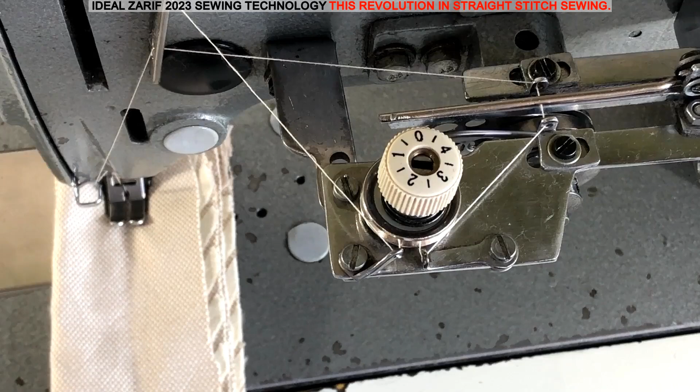During sewing, the top thread tensioner nut and the bottom thread tensioner nut, not shown, remain in a fixed position, ensuring the normal thread tension, neither too loose nor too tight.

In our Ideal Zarif 2023 year double thread chain stitch technology, the needle is not involved in pre-tightening the top thread loop from the previous stitch. As a result, for the first time ever, a double thread chain stitch sewing machine uses a needle with a one long groove. This design offers greater resistance to bending compared to the double groove needle used in existing double thread and multi-thread chain stitch technologies.

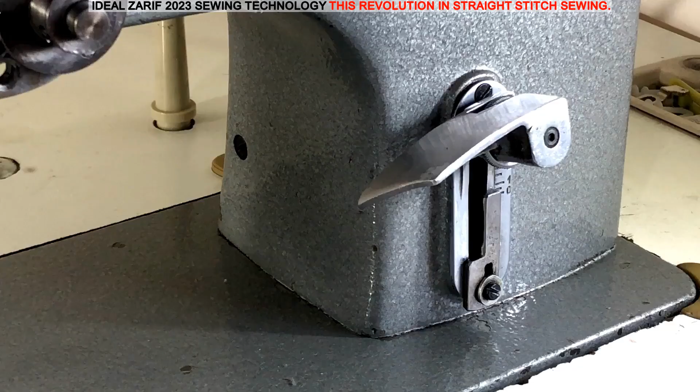Thanks to our Ideal Zarif 2023 year sewing technology, it has become possible for the first time in the world to reduce the length of the double thread chain stitch to 0.5 mm. This allows for a more secure tacking of the chain stitch seam end and prevents unraveling due to condensed stitches at a stitch length of 0.5 mm.

Streamlined design with innovative rotary looper. The world's first sewing machine with an exceptionally simple mechanical design, made possible by the incorporation of a rotary looper, 2 rotary twin-disc cam thread take-ups, a simple needle crank slider mechanism and the absence of needle guards.

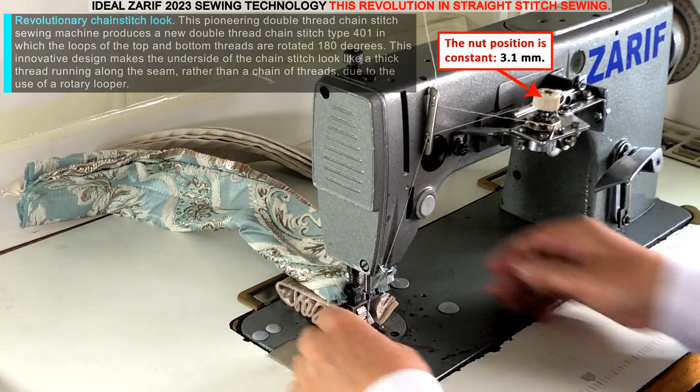Revolutionary chain stitch look. This pioneering double-thread chain stitch sewing machine produces a new double-thread chain stitch type 401 in which the loops of the top and bottom threads are rotated 180 degrees. This innovative design makes the underside of the chain stitch look like a thick thread running along the seam, rather than a chain of threads, due to the use of a rotary looper.

One long groove needle for maximum strength. For the first time, a double-thread chain stitch sewing machine uses a needle with one long groove to produce a double-thread chain stitch type 401, which offers greater flexural strength than a needle with two long grooves used in existing double-thread and multi-thread chain stitch technologies.

Advanced capabilities for sewing thick materials. This groundbreaking sewing machine can sew materials up to 8 mm thick with a short needle bar stroke of 32 mm, thanks to our know-how.

Breakthrough in needle stability for different materials. This revolutionary sewing machine can sew different materials without needle breakage and needle point deformation, achieved by the use of a rotary looper and a needle plate with a slot for the needle, coupled with the absence of needle guards.

Elimination of skipped stitches and unraveling. This pioneering sewing machine, thanks to our innovative design, can sew materials without a single skipped stitch, which is critical for chain stitch seams, as all types of chain stitch seams are prone to unraveling, both at the end of the seam if not securely tacked, and from the skipped stitch back to the beginning of the seam.

No thread breaks. The first sewing machine capable of sewing through materials without thread breaks when low-strength threads and threads with knots are not used, thanks to the smooth tightening of the top and bottom threads with two rotary twin-disc cam thread take-ups and our know-how.

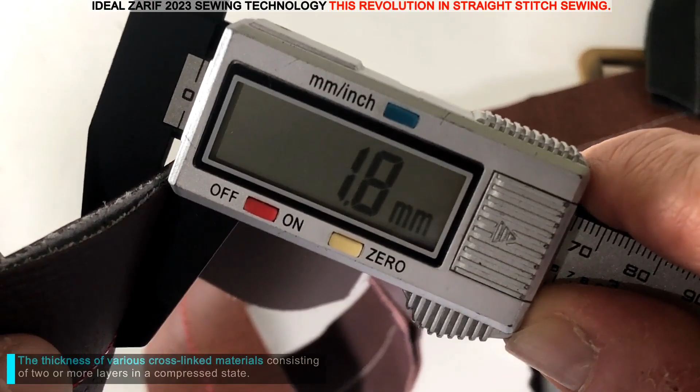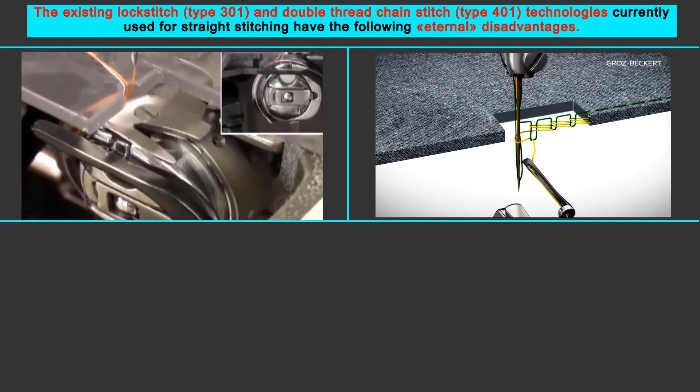The existing lockstitch, type 301, and double-thread chain stitch, type 401, technologies currently used for straight stitching have the following eternal disadvantages common to both existing sewing technologies: they cannot guarantee sewing without skip stitches, thread breakage, needle breakage, and needle point deformation.

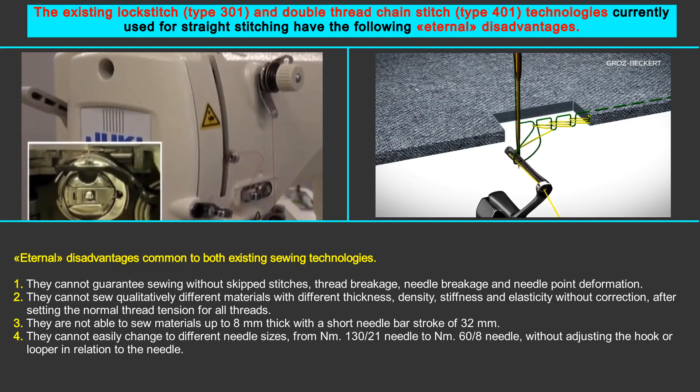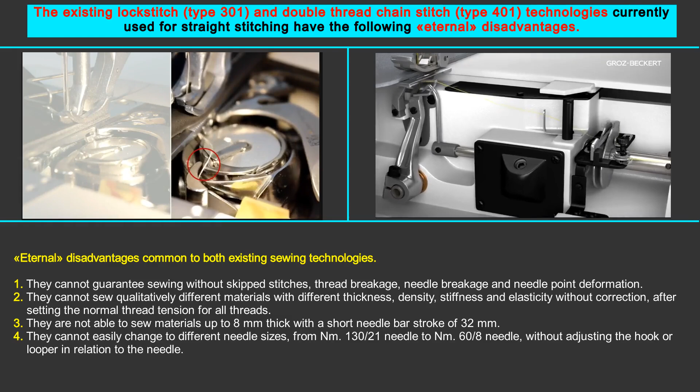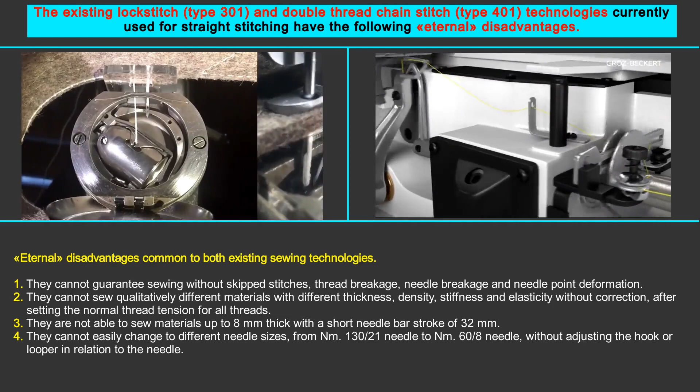They cannot sew qualitatively different materials with different thickness, density, stiffness, and elasticity without correction, after setting the normal thread tension for all threads. They are not able to sew materials up to 8 mm thick with a short needle bar stroke of 32 mm. They cannot easily change to different needle sizes, from number 130 needle to number 60 needle, without adjusting the hook or looper in relation to the needle.

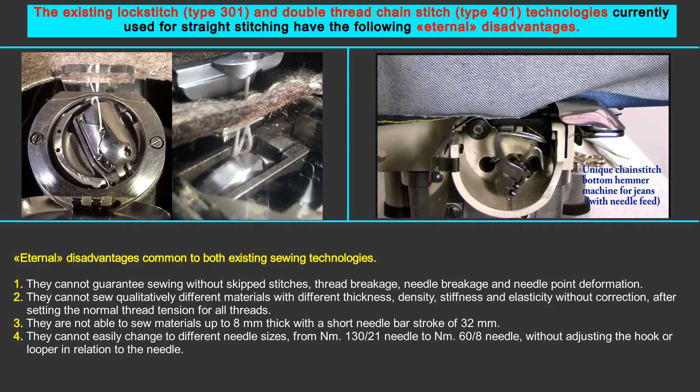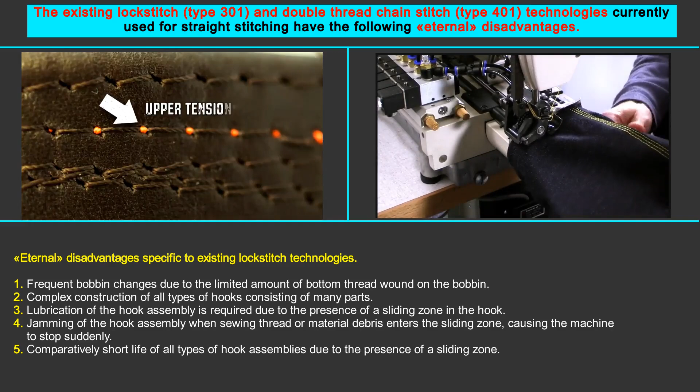Eternal disadvantages specific to existing lockstitch technologies: frequent bobbin changes due to the limited amount of bottom thread wound on the bobbin, complex construction of all types of hooks consisting of many parts, and lubrication of the hook assembly is required due to the presence of a sliding zone in the hook.

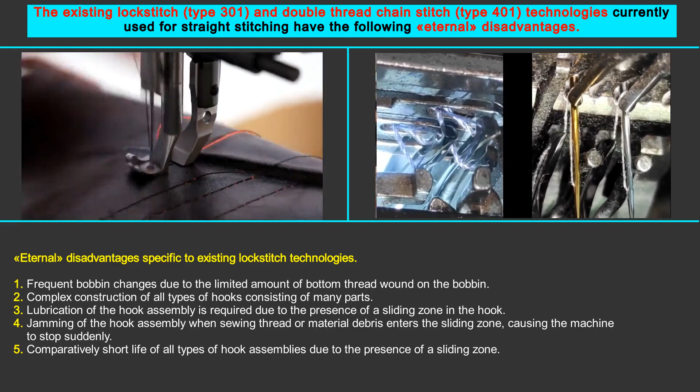Jamming of the hook assembly when sewing thread or material debris enters the sliding zone, causing the machine to stop suddenly. Comparatively short life of all types of hook assemblies due to the presence of a sliding zone.

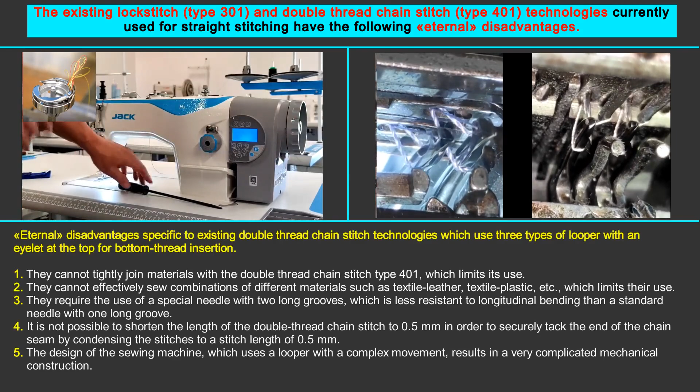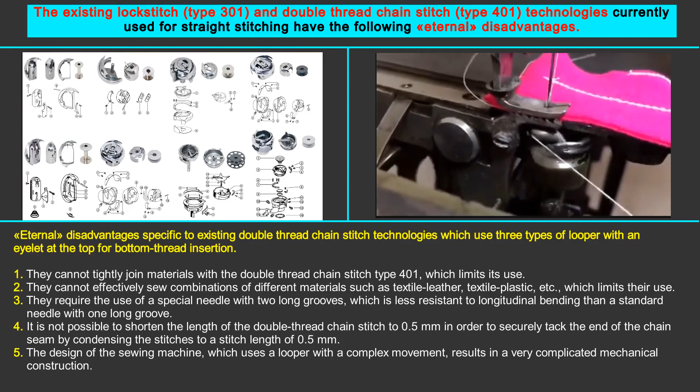Eternal disadvantages specific to existing double thread chain stitch technologies, which use 3 types of looper with an eyelet at the top for bottom thread insertion: they cannot tightly join materials with the double thread chain stitch type 401, which limits its use. They cannot effectively sew combinations of different materials such as textile leather, textile plastic, etc., which limits their use.

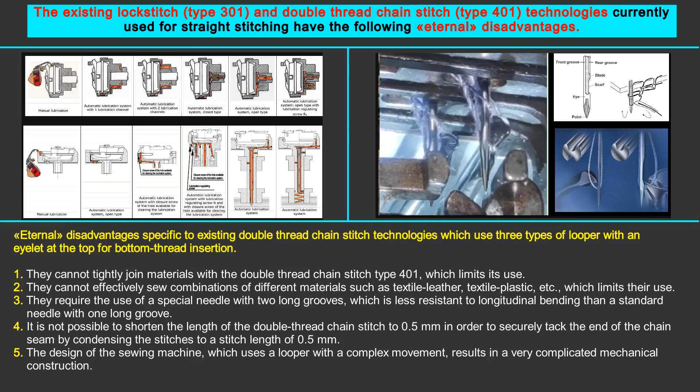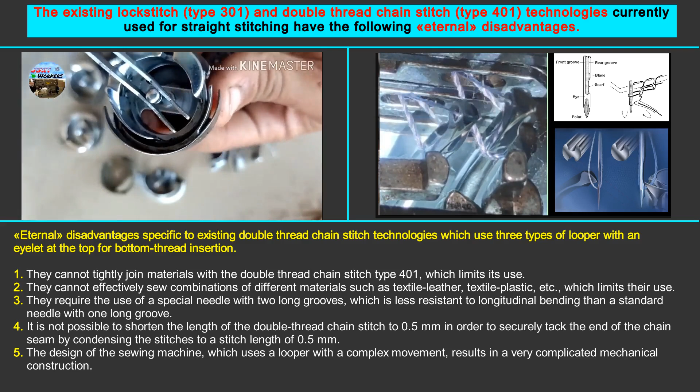They require the use of a special needle with 2 long grooves, which is less resistant to longitudinal bending than a standard needle with 1 long groove. It is not possible to shorten the length of the double thread chain stitch to 0.5 mm in order to securely tack the end of the chain seam by condensing the stitches to a stitch length of 0.5 mm.

The design of the sewing machine, which uses a looper with a complex movement, results in a very complicated mechanical construction.

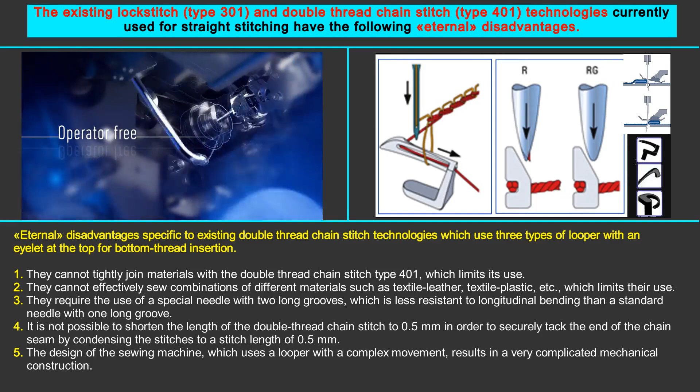Our ideal Zarif 2023 year double thread chain stitch technology has revolutionized sewing machine design and straight stitch sewing. For the first time, a rotary looper is used to form a double thread chain stitch, resulting in the world's first new double thread chain stitch type 401, where the top and bottom thread loops are rotated 180 degrees.

For the first time, an ordinary needle with a single long groove is used to form a double thread chain stitch, as the needle does not participate in the pre-tightening of the top thread loop placed in the previous stitch. For the first time, materials up to 8 mm thick can be sewn with a needle bar stroke of 32 mm.

For the first time it is possible to sew materials of different thickness, density, stiffness and elasticity without any adjustments by setting the normal tension for all threads. For the first time it is possible to sew without skipped stitches, thread breakage, needle breakage and needle point deformation, provided the thread is free of knots and the needle size matches the material being sewn.

For the first time, using our know-how, it is possible to tightly pull the top thread loop in a stitch to achieve a dense material join, or to loosely pull the top thread loop in a stitch to get smooth seams on light materials and elastic seams in stretchable materials, without adjusting normal thread tension.

For the first time, the maximum allowable gap between the needle and the tip of the looper has been increased to 0.5 mm, allowing an easy transition from a number 130 needle to a number 60 needle without adjusting the looper relative to the needle.

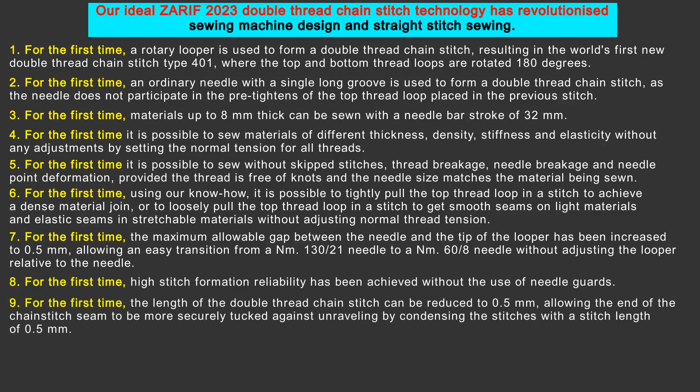For the first time, high stitch formation reliability has been achieved without the use of needle guards. For the first time, the length of the double thread chain stitch can be reduced to 0.5 mm, allowing the end of the chain stitch seam to be more securely tucked against unraveling by condensing the stitches with a stitch length of 0.5 mm. For the first time, it is possible to develop different types of sewing machines...

...with different types of platforms and different types of material feed, with a very simple mechanical design that operates with high reliability and long service life.

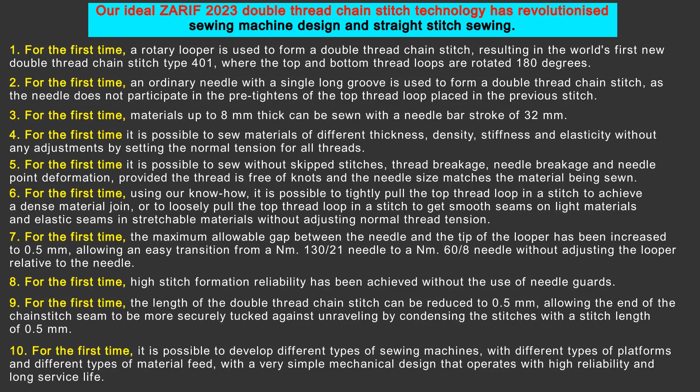History of Zarif double thread chain stitch technology with rotary looper.

In 1994 we came up with the idea of creating a double thread chain stitch type 401 using a rotary looper. We applied for a patent for this new Zarif double thread chain stitch technology, and in 2000 US patent number 6095069 was granted.

Before our invention, the rotary looper was used in the single thread chain stitch technology, type 101, on single thread chain stitch sewing machines and button machines.

History records that the rotary looper was invented in 1857 by the American inventor James Edward Allen Gibbs for his single thread chain stitch sewing machine, based on the single thread chain stitch technology, type 101, where the rotary looper makes 1 revolution per needle cycle. See US patent number 17427.

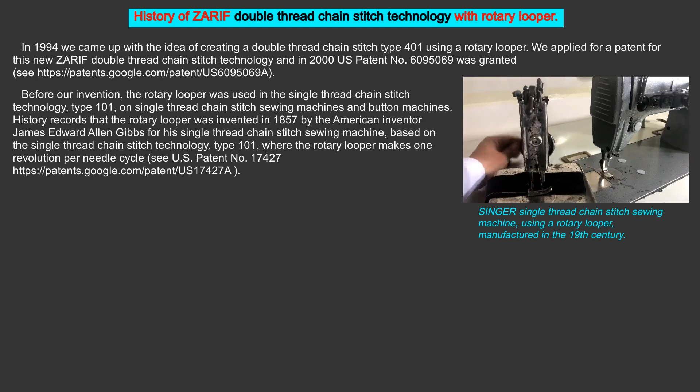A rotary looper is a unique and the only tool in sewing technology that can rotate loops of thread around its body by turning them 180 degrees with its tail.

As is known, the rotary looper is made in one piece and has 3 zones: the head zone with a front tip to catch the thread and a rear tip to release the thread loop from the body of the looper, the tail zone for rotating the thread loop through 180 degrees, and the shaft zone for attaching the looper to the machine.

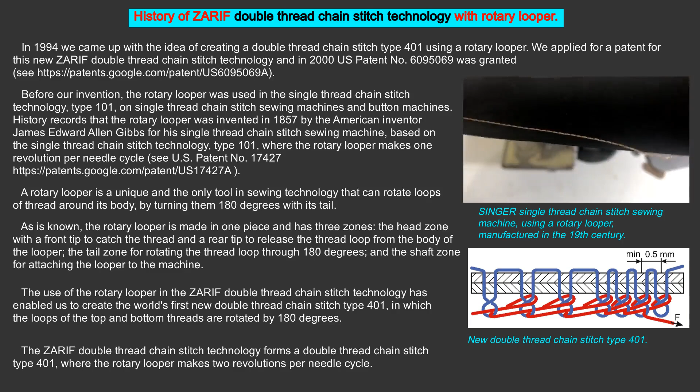The use of the rotary looper in the Zarif double thread chain stitch technology has enabled us to create the world's first new double thread chain stitch type 401, in which the loops of the top and bottom threads are rotated by 180 degrees. The Zarif double thread chain stitch technology forms a double thread chain stitch type 401, where the rotary looper makes 2 revolutions per needle cycle.

Zarif double thread chain stitch technology with rotary looper, invented by us in 1994. See US patent number 6095069.

In the Zarif double thread chain stitch technology, the top thread is fed to the looper by a needle with a vertical reciprocating motion, as is usually done. To feed the bottom thread to the looper, a bottom thread pusher is used, which makes oscillating movements in the horizontal plane. Since the rotary looper can loop thread around its body in the form of a loop...

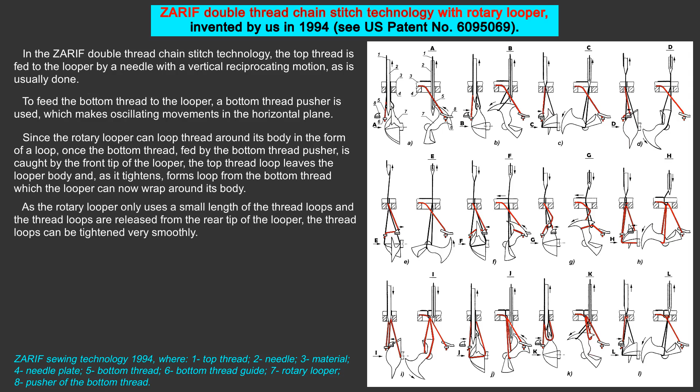Once the bottom thread, fed by the bottom thread pusher, is caught by the front tip of the looper, the top thread loop leaves the looper body and, as it tightens, forms a loop from the bottom thread which the looper can now wrap around its body. As the rotary looper only uses a small length of the thread loops, and the thread loops are released from the rear tip of the looper, the thread loops can be tightened very smoothly.

Therefore, the Zarif double thread chain stitch technology uses 2 rotary twin disc cam thread take-ups to feed and tighten both the top and bottom threads, with each thread being controlled separately.

History of the prototype development of the Zarif sewing machine based on Zarif double thread chain stitch technology with a rotary looper. In 1997, we decided to build a prototype sewing machine to test our new Zarif double thread chain stitch technology with a rotary looper, which we had invented in 1994.

We chose a Class 1022 lockstitch industrial sewing machine from the Belarusian company Orsha because it was widely used in Uzbekistan at the time and was relatively affordable. The machine had a needle bar stroke of 32 mm and was designed to sew fabrics of medium thickness.

After a thorough review of the machine's design, we successfully integrated our new Zarif sewing technology into the machine, retaining only the mechanisms of the material feed, presser foot, and needle. Thus, in 1997, we produced the world's first prototype of the Zarif double thread chain stitch sewing machine with rotary looper.

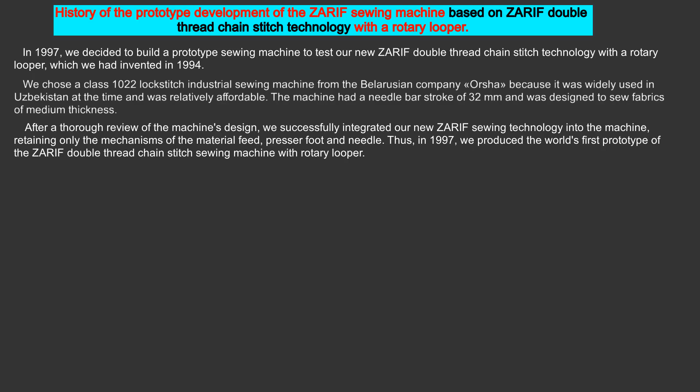Trials on a prototype Zarif sewing machine allowed us to identify some of the shortcomings of our new Zarif double thread chain stitch technology developed in 1994.

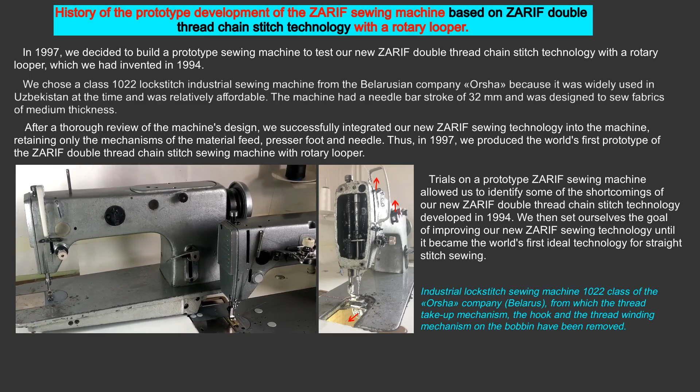We then set ourselves the goal of improving our new Zarif sewing technology until it became the world's first ideal technology for straight stitch sewing. We have reached our goal in 2023.

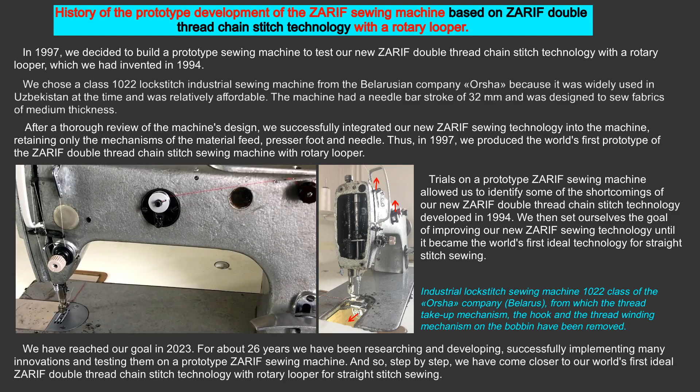For about 26 years we have been researching and developing, successfully implementing many innovations and testing them on a prototype Zarif sewing machine. And so, step by step, we have come closer to our world's first ideal Zarif double thread chain stitch technology with rotary looper for straight stitch sewing.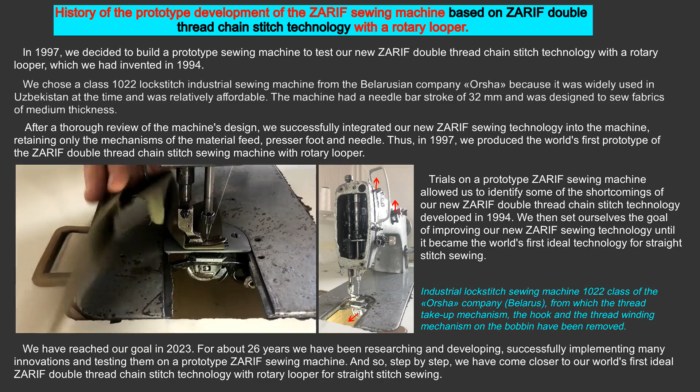Stitch type, working units, and technical specifications of the prototype Zarif sewing machine, based on the ideal Zarif 2023 year double thread chain stitch technology with rotary looper.

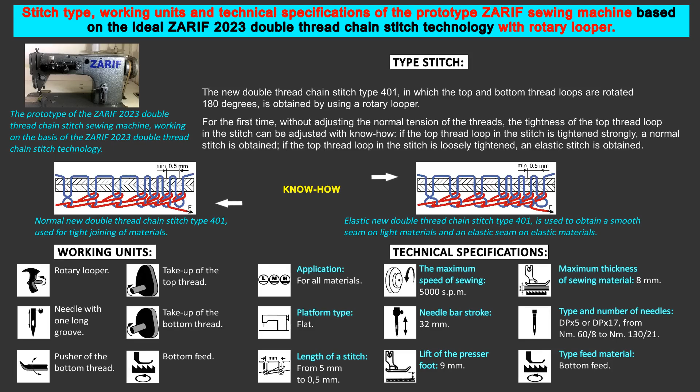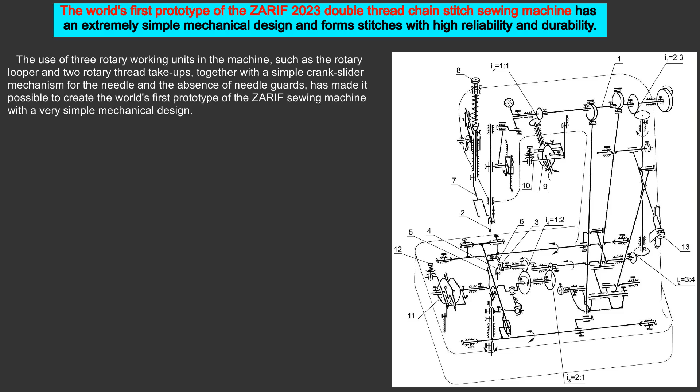The world's first prototype of the Zarif 2023 double thread chain stitch sewing machine has an extremely simple mechanical design and forms stitches with high reliability and durability. The use of 3 rotary working units in the machine, such as the rotary looper and 2 rotary thread take-ups, together with a simple crank slider mechanism for the needle and the absence of needle guards, has made it possible to create the world's first prototype of the Zarif sewing machine with a very simple mechanical design.

In addition, the machine is the first in the world to allow easy switching between different needle sizes, from needle number 130 to needle number 60, without having to adjust the position of the looper relative to the needle, thanks to the world's first increase of the maximum allowable gap between the needle and the looper tip to 0.5 mm.

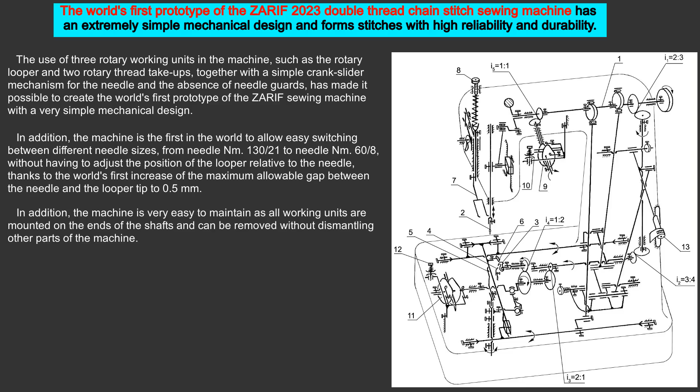In addition, the machine is very easy to maintain, as all working units are mounted on the ends of the shafts and can be removed without dismantling other parts of the machine.

Kinematic diagram of the prototype Zarif 2023 year double thread chain stitch sewing machine.

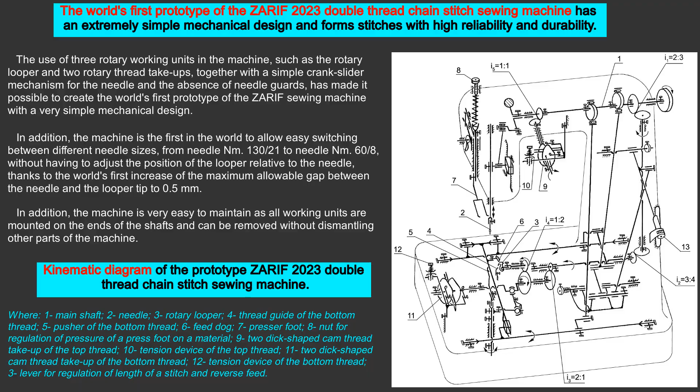Our automatic thread trimming technology for the Zarif double thread chain stitch technology with rotary looper. It is well known that most modern industrial sewing machines are equipped with automatic thread trimming, and all automated sewing systems require automatic thread trimming.

With this in mind, we have long been researching and developing automatic thread trimming technology for our Zarif double thread chain stitch technology with rotary looper. Thanks to these efforts, we successfully invented the automatic thread trimming technology for our Zarif double thread chain stitch technology with rotary looper in 2020, and further improved it in 2021 and 2023.

The advanced version of our automatic thread trimming technology, which we invented in 2023, has not yet been physically manufactured to ensure its practical functionality. However, the drawings of our automatic thread trimming technology prove that it works in theory. At present we cannot disclose the details of our automatic thread trimming technology, as it is not yet patented.

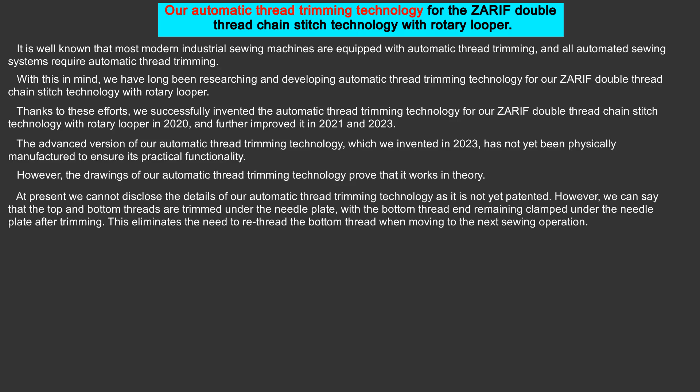However, we can say that the top and bottom threads are trimmed under the needle plate, with the bottom thread end remaining clamped under the needle plate after trimming. This eliminates the need to rethread the bottom thread when moving to the next sewing operation.

If the sewing process is finished with condensed stitches of 0.5 mm stitch length and manual thread trimming, the resulting chain stitch seam will be difficult to unravel from the end of the seam. If the sewing process is finished with condensation stitches at a stitch length of 0.5 mm and with automatic thread trimming, the resulting chain stitch seam cannot be unraveled from the end of the seam, as the end of the top thread passes through the last loop of the bottom thread.

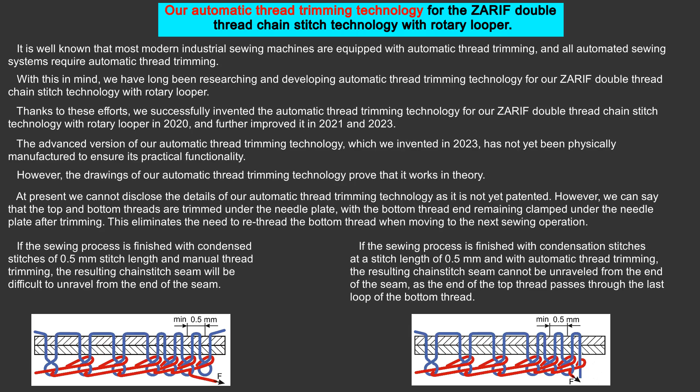Our ideal Zarif 2023 year double thread chain stitch technology with rotary looper opens a new era in the development of automated straight stitch sewing.

It is well known that the future of mass production in various sewing industries is closely linked to automation, and the automation of sewing processes plays an important role in this transformation. Currently, some sewing operations are already being automated using robotic manipulator-controlled sewing systems. In the future, these robotic manipulators may be replaced by more advanced humanoid robots.

When it comes to automated sewing, it is essential that the process is performed to a high standard, ensuring that there are no skipped stitches, thread breakage, needle breakage and deformation of the needle point. Efficient sewing of different materials without the need for adjustments is also critical to the automation of the sewing process.

Our ideal Zarif 2023 year double thread chain stitch technology with rotary looper for straight stitch sewing is the perfect solution to meet all these requirements. Our prototype Zarif sewing machine has proven this in practice, but only when the material is fed in one direction.

This allows us to create different automatic sewing systems based on this technology, where the material is fed in a single direction. However, there are many sewing operations where the stitch must follow a complex path. In such cases, stitch formation must be independent of the material feed direction. With this in mind, we have been working for a long time to develop a device that would allow our Zarif double thread chain stitch technology with rotary looper to produce stitches regardless of the direction of material feed.

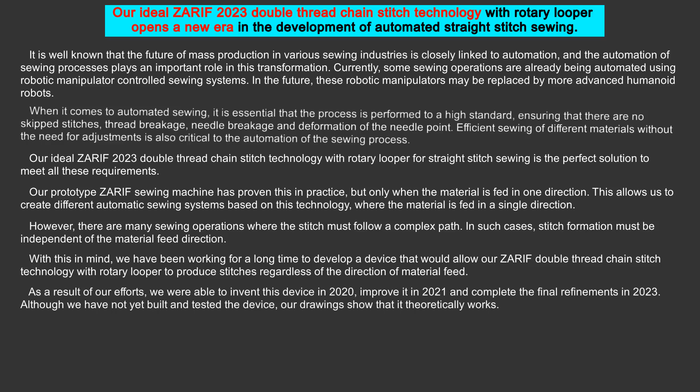As a result of our efforts, we were able to invent this device in 2020, improve it in 2021, and complete the final refinements in 2023. Although we have not yet built and tested the device, our drawings show that it theoretically works.

Patent protection for our inventions that we invented in 2023. We intend to secure patents in several countries around the world for all our inventions developed in 2023, including the ideal Zarif double thread chain stitch technology with rotary looper, automatic thread trimming technology, and the device that allows stitch formation with material feed in any direction.

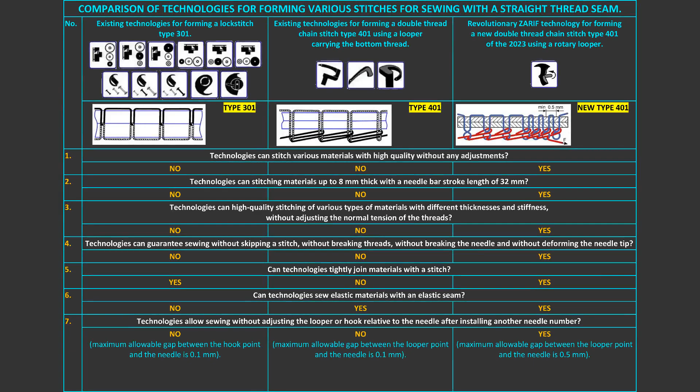Advantages and disadvantages of lockstitch type 301 and double thread chain stitch type 401. Comparison of technologies for forming various stitches for sewing with a straight seam.

Application of the revolutionary ideal Zarif 2023 year double thread chain stitch technology with a rotary looper that forms stitches in only one direction. Our prototype Zarif sewing machine, based on the ideal Zarif 2023 year double thread chain stitch technology with rotary looper, has proven its ability to perform straight stitching with material feed in only one direction and a stitch length ranging from 0.5 mm to 5 mm.

In addition, we have developed a technical solution that allows the stitch length to be increased to 10 mm. Based on our ideal Zarif 2023 year double thread chain stitch technology, which forms stitches in only one direction, the following machines can be designed and manufactured.

Various industrial sewing machines with different types of platforms and material feed mechanisms. Various automated sewing systems with material feed in one direction only. A range of programmable automatic pattern sewing machines with a 360 degrees rotating head that can feed material in any direction to create complex stitch patterns.

Application of the revolutionary ideal Zarif 2023 year double thread chain stitch technology with a rotary looper, forming stitches in any direction. If the device we invented in 2023, which enables our ideal Zarif 2023 year double thread chain stitch technology with a rotary looper to form stitches with material feed in any direction, works successfully in practice, the following automated machines can be designed and manufactured on the basis of it, enabling the production of complex stitch patterns.

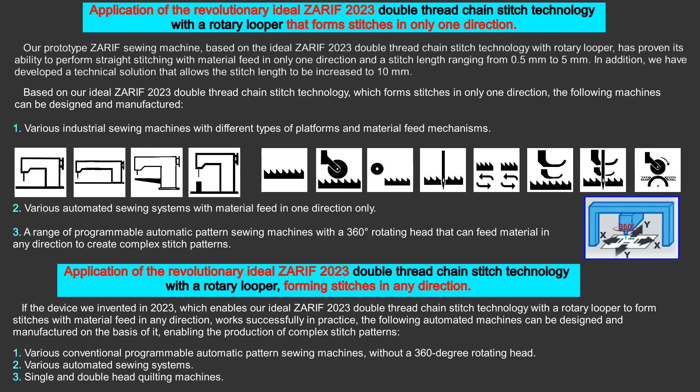Can our revolutionary ideal Zarif 2023 year double thread chain stitch technology with a rotary looper become obsolete in the future? We are confident that this will not happen. Our confidence is based on the following undeniable facts.

The eternal disadvantages of the existing sewing technologies currently used for straight stitch sewing, such as the lockstitch type 301 and the double thread chain stitch type 401, prevent them from becoming the ideal solution for straight stitch sewing, no matter how much they evolve in the future.

Furthermore, the invention of an ideal straight stitch sewing technology can only be achieved by creating a new double thread chain stitch technology that eliminates the eternal disadvantages of existing sewing technologies.

Since it is technically impossible to invent an ideal straight stitch sewing technology by developing a new lockstitch technology without using a hook. However, the task of inventing a new double thread chain stitch technology and making it the ideal solution for straight stitch sewing is a very challenging one.

All previous attempts to invent a new double thread chain stitch technology and make it the ideal solution for straight stitch sewing were unsuccessful. For example, the new double thread chain stitch technology using a special hook, see US patent number 3811392, 1974, was never commercialized.

We believe that any new double thread chain stitch technology using a special hook cannot become an ideal solution for sewing due to the complexity of the special hook design and the need for lubrication.

We were the first in the world to invent the new Zarif double thread chain stitch technology with rotary looper in 1994, which was granted US patent number 6095069 in 2000. It took us about 26 years to make this new Zarif sewing technology the world's first ideal straight stitch sewing technology.